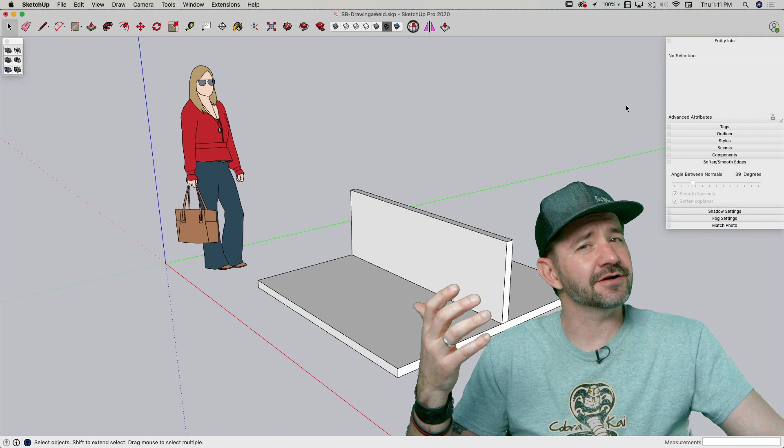So I want to take a look at something. This was actually a request that came up—I've seen this on our forums a couple times too. Somebody asked me how I would go about drawing a weld, not just two pieces connecting, but the little bead of molten metal between the two pieces connecting them. The messier the better was one of the comments, like how to make it obviously look like a weld, because if you grind it and clean it up nice and smooth, it's easier, but if the weld's messy, it's harder to model. I have an idea of how I'd do that, so let's take a look at it right now.

All right, so I have two groups here meant to represent metal plates of some sort. I'm going to start making some geometry, throw it down here. We'll use solid tools, so I have solid tools over here. It's going to be pretty basic, simple tools we're going to use.

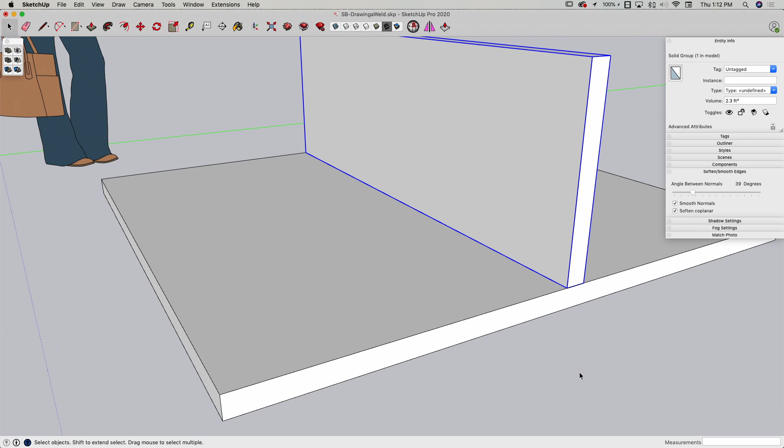Let's start with the Polygon tool. I'm going to come over here, grab the Polygon tool, and draw a polygon. Actually, I'm not going to use polygons—I'm going to use a circle instead, with 8 sides.

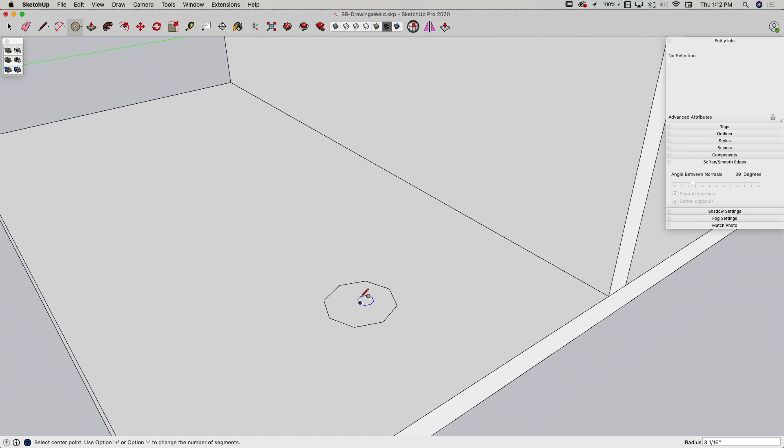Why a circle instead of a polygon? I'm just going to draw a shape here on the ground—the sizes aren't going to really matter, I'll resize this stuff as needed. If I pull this up, this is why I use a circle instead of a polygon: when I'm done, I want these shapes to be kind of organic and smooth, so using a circle automatically smooths the edges like this, and it's less geometry to smooth.

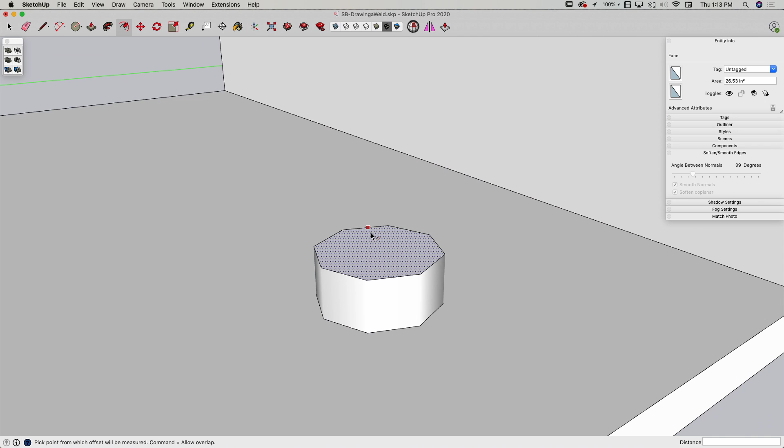So I'm going to create a circle with 8 sides, pull it up like this, and come in here with an offset at about halfway or so. Then I'll select that face and go to move, moving it vertically, creating kind of a dome shape. That's what I'm looking for.

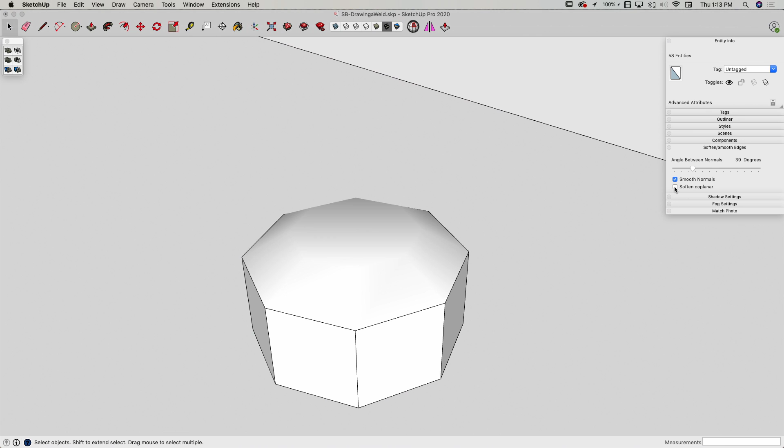Before I go any further, I'm going to take this line right here and smooth it—actually I want to smooth all of this. So I'll triple click, toggle soften and smooth, and bring it up till all the lines up top disappear. That's what I'm looking for. This is going to represent one chunk of weld—I think that's the technical term.

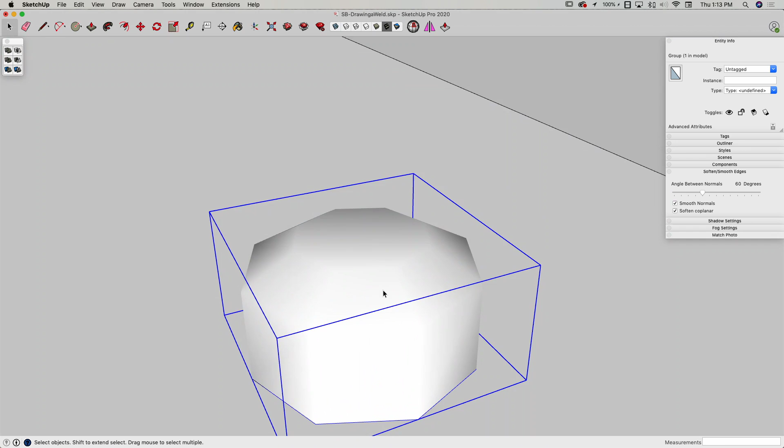I'm going to triple click this and make it into a group. I'm not going to create a component because I want these to potentially be a little different, so it's just going to be a group. I do want to make sure it's solid though, so no extra pieces inside here. For some reason this isn't showing up as solid right now.

If I move this vertically, it's because when I made the group I didn't include the ground. Let me undo that. I'll triple click so it includes the piece on the bottom, and then when I make it a group, it should pop up and say it's a solid group.

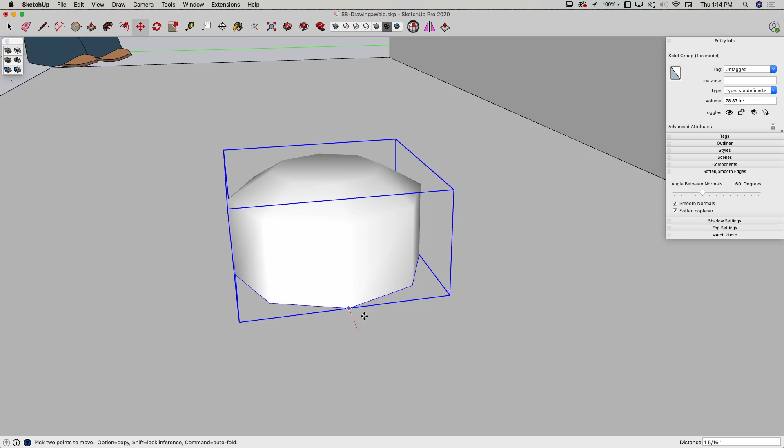All right, perfect. So now I'm going to grab it by this corner and lay that corner right into the corner of the two pieces. Perfect. Now I'm going to rotate it on the red axis, right where these two pieces meet, and rotate it down 45 degrees.

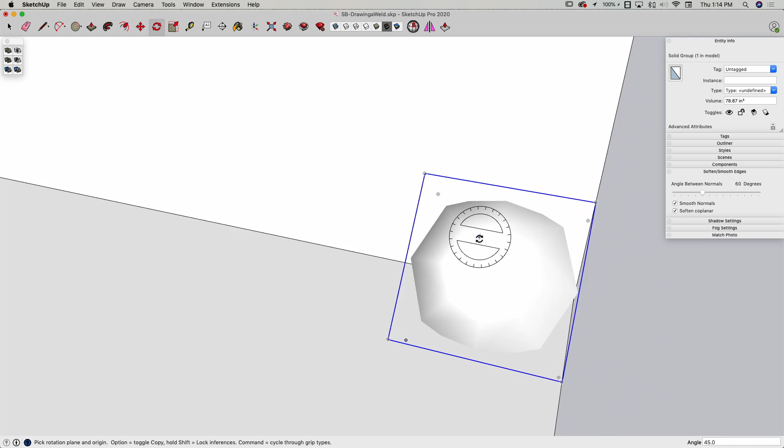So that creates just kind of a little lump there. So I could actually, right now, without doing any more work, I could take that, use move with the modifier key to just start moving copies over, kind of move them not too perfectly, but every couple, like an irregular pattern of a line of weld like that.

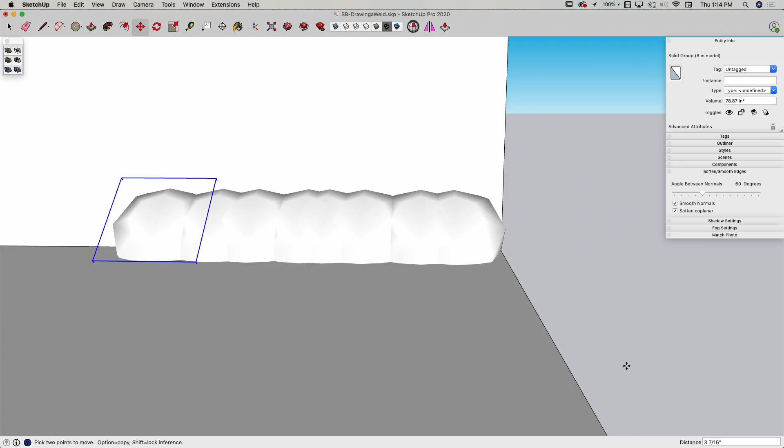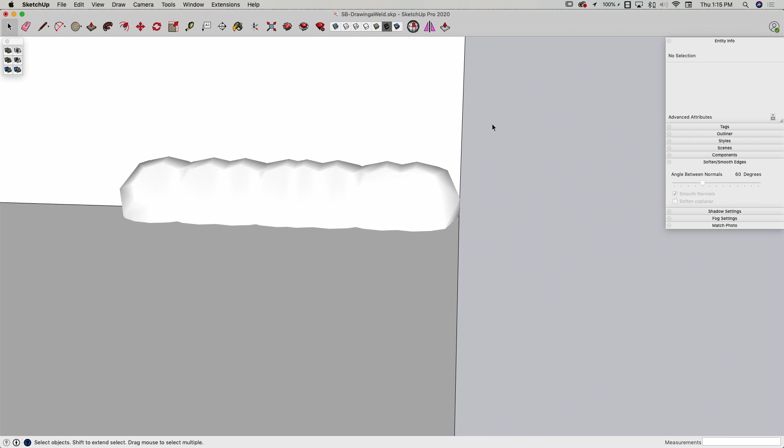That could work, that could be good enough. I could actually take that right now, grab all of that, use solid tools on it, use the outer shell, click, and then run smooth on it. So it's possible that right there might be a good enough weld.

I could take that, do a little deformation, maybe scale it, stretch it out a little bit, and that could probably pass for a weld if I zoom back like that. That doesn't look too bad. That's a good way to do it.

But let's go a little bit further. I'm going to undo a couple times and get back to just my single weld piece.

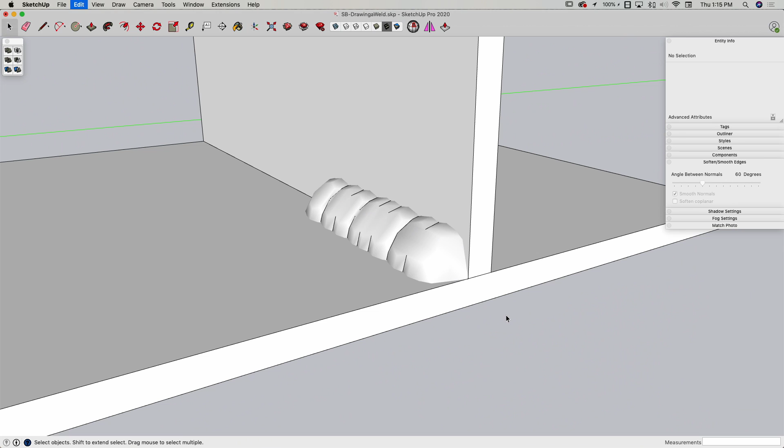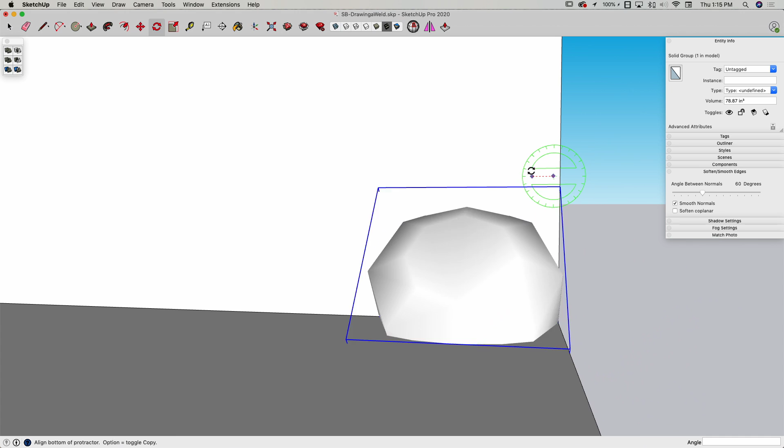So as weld pushes along, it kind of dips up and drops down in profile. So I'm going to take this piece, I want to actually rotate it like 30 degrees across this axis. So I can't, it's not real easy. If I come in here to rotate it right now, I'm going to get off kind of wonky, weird axes.

What I'm going to do is double click to go inside the group. When I go inside the group, you can see how my axes change to inline here. Let's go to View, Component, Edit, and Hide Rest of Model, get rid of everything else.

So what this lets me do is grab everything while I'm inside the group, go to Rotate, I can constrain to the green axes and then use this point to pull it this way, like maybe 30 degrees. There you go. See what I'm going for?

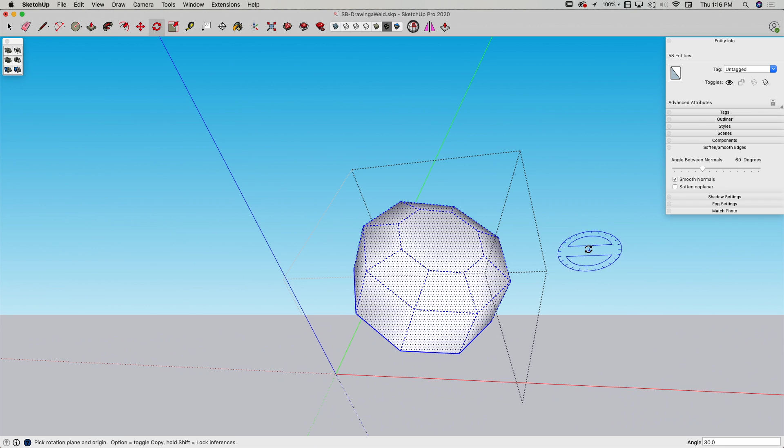That's going to jump up a little bit. I'm going to need to move it a little bit, so I'm going to select it, and we'll move it back a little bit from the corner. We'll move it horizontally and vertically to kind of bury it down into that. Oh yeah, that's what I was looking for.

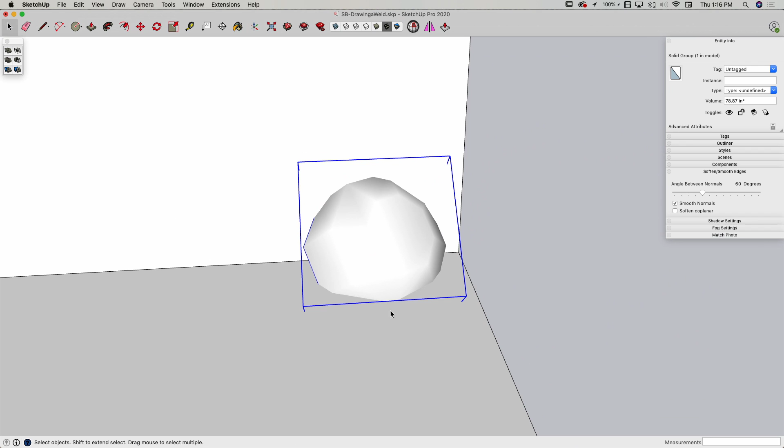That's better. So I'm going to grab that now, go to Move, modifier key to make a copy. There we go. See how we're getting that kind of ripple that happens when welding gets done?

So I'll make another copy. That one I won't move quite as far. Next one I'll move a little bit further. Yeah, so that's kind of cool looking. That's what I'm going for. That's what I actually want to see.

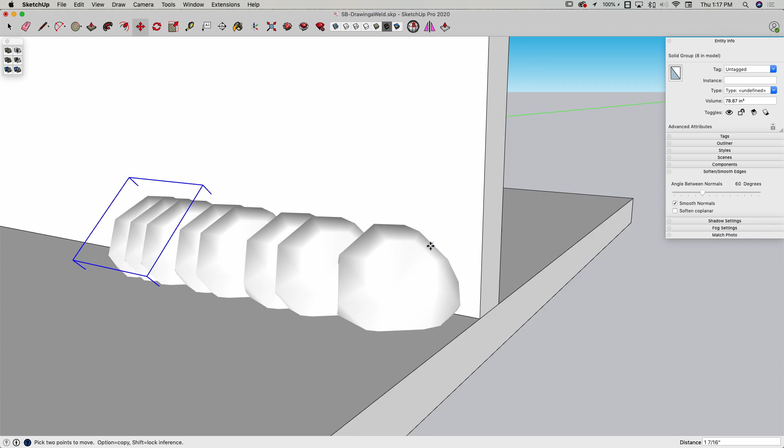If I look at it from the edge though, I'm going to do more cleanup, but it looks pretty uniform, right? So it looks a little too good.

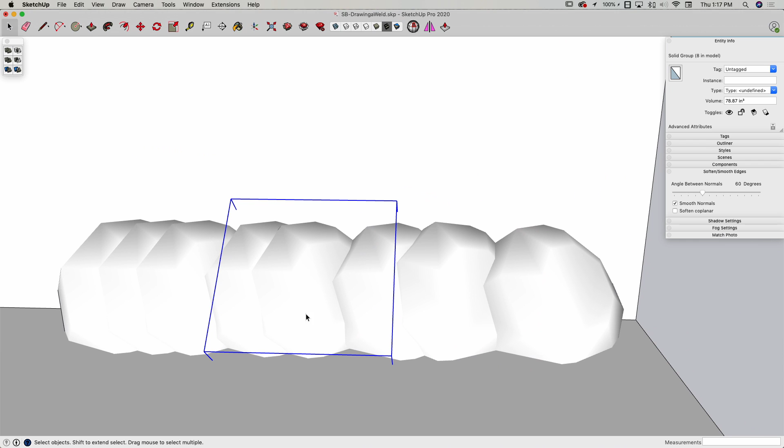So what I'm going to do is pick this second one, and go into Move, and give it just a little rotation. I'm going to go every couple and use Move to rotate it back and forth. I could do one after another too. I mean, I could do this, that would work too. But that's going to spin it around so I don't have that uniform look.

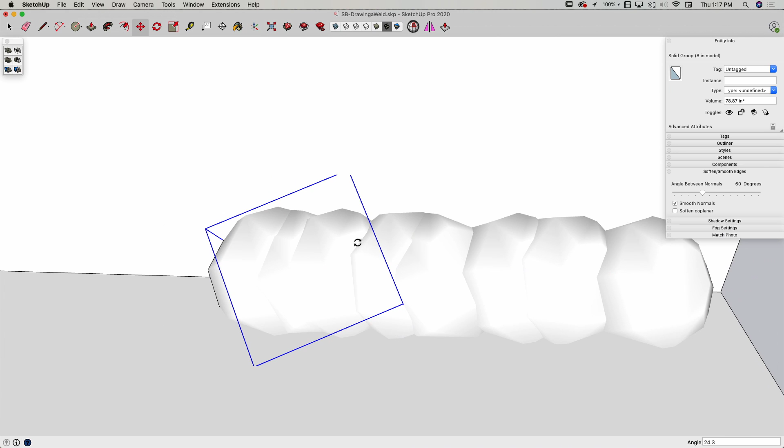See, these ones all line up perfectly. These ones don't. Makes it look a little bit more like it's not perfectly created by a computer program or something.

All right, so I'm gonna flip this one, just a little bit of rotation. Oh yeah, there we go. So you got some non-uniformness there.

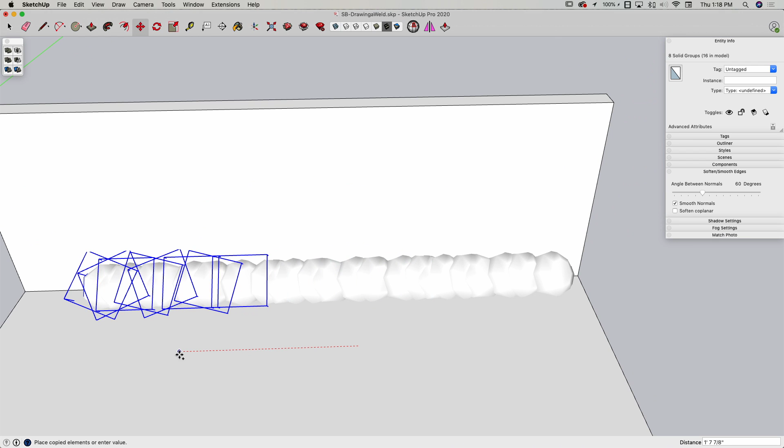Now I'm gonna grab all of these and modify or copy again. So we will have a repeating pattern here, but if we do that, and then I'll copy it one more time, this time I'll move it over a little bit more. All right, so there, that's a good string. That looks like it could make a good weld. So now I can grab all of this.

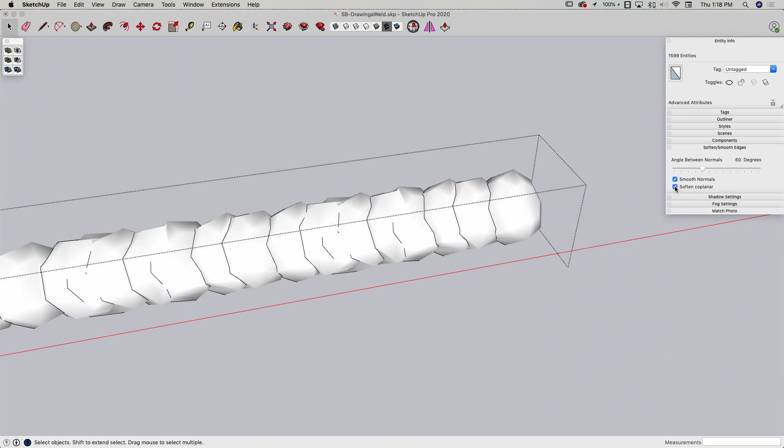I'm going to grab all of these now and make it an outer shell. That's looking pretty cool, that looks nice. I can do a little bit more cleanup here, going into the group, triple clicking, and softening it again.

And here I can just crank this up because I want this to look like one bubbly, weird piece. I can do some deformation at this point too, so like I did before, I can hit scale and stretch this out, and even kind of bring it down a little bit.

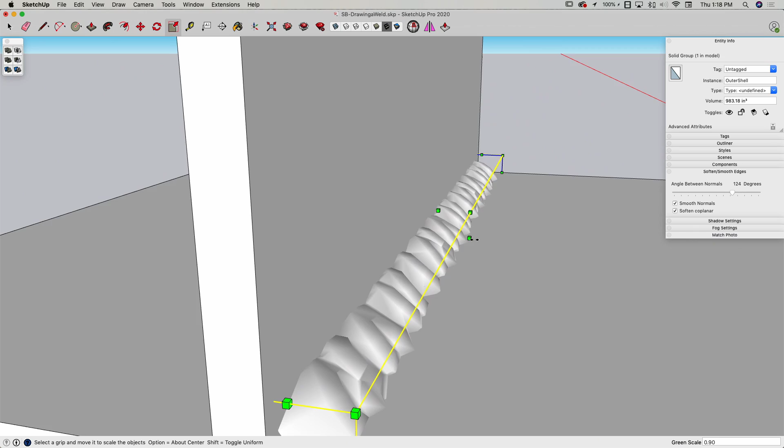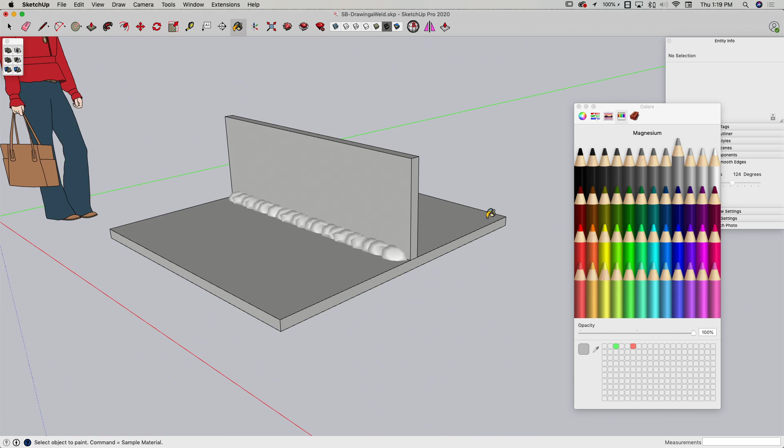That looks pretty good, and then the final piece is probably just going to be some color. This white on white makes it look odd, but if I come in here with my paint bucket, maybe we'll give a nice light silver, a little darker, to the weld, and then maybe just a slightly darker color to the plate. And still big, this is huge, but if I grab all that and scale it down...

Yeah, that could pass for a messy weld. I've welded once, and this is not too far from what I was able to create. That's not a brag, that's just a statement.

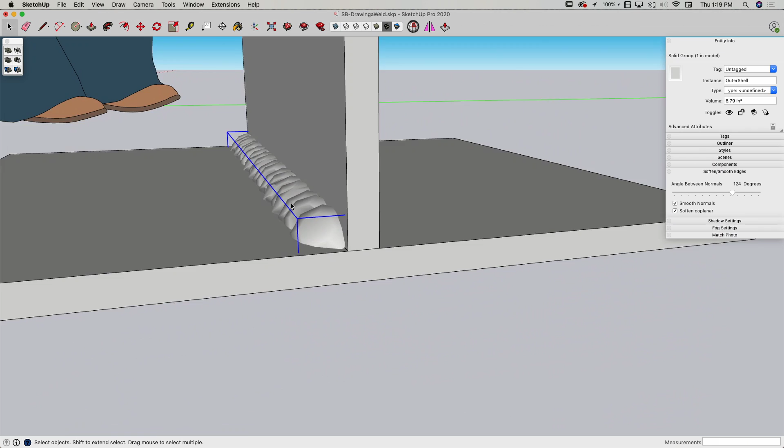If I was to go just a little bit further, one more thing I wanted to do, I could make this a reusable piece if I wanted to. One of the things I could do is select it, and then I could actually cut it off at these two pieces. I could select this piece right here, and use this piece to trim this, so that's going to break it on that side.

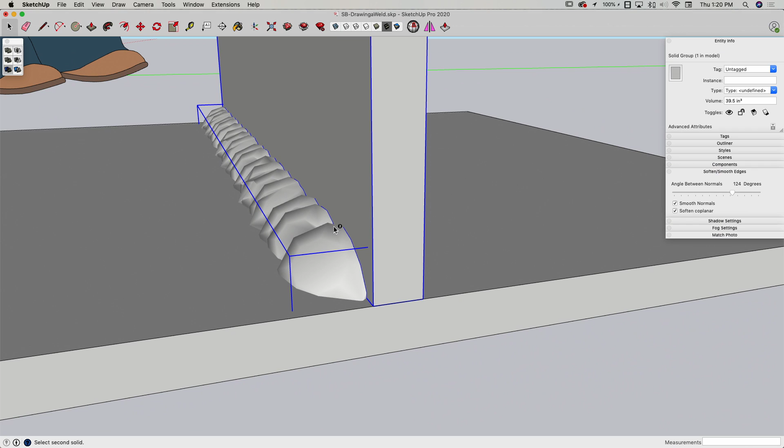Same thing, I'll grab this bottom piece, trim, break it on this side. And what that's going to let me do then is I could actually select that, bring it over here, and then let's actually go ahead and use the rotate handles and move to spin that 90 degrees.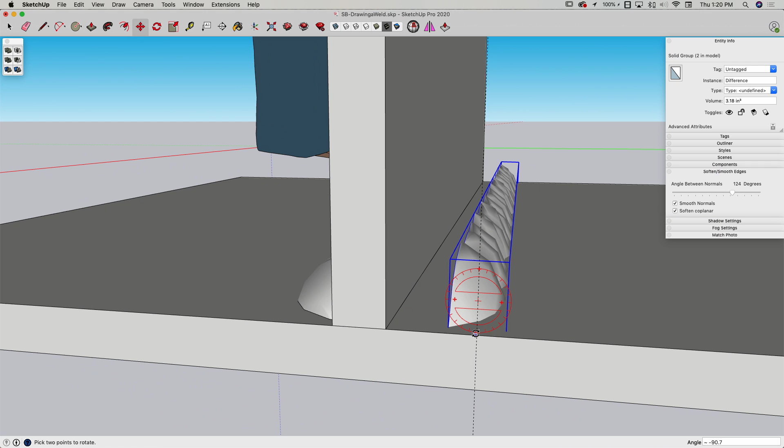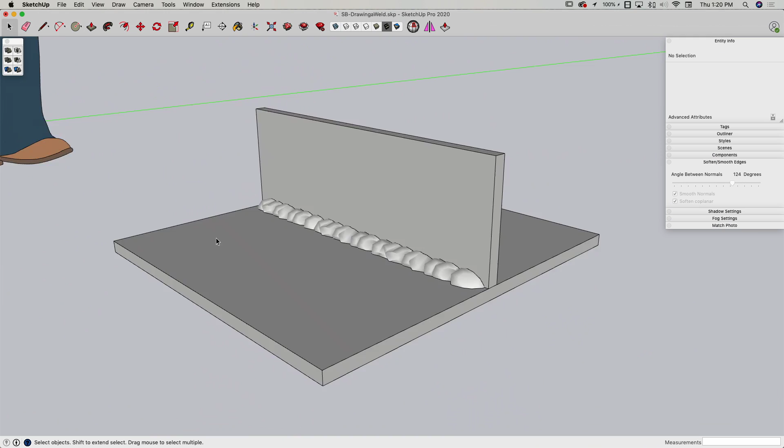Oh, I had it, let's just type 90. I'm sorry, minus 90. And then we'll take that as it is and grab it by that endpoint, drop that endpoint right here with that, and slide it over. We could actually make that a component then and stretch it as needed or multiply it up so we have multiple pieces. But that is how I would go about making a messy weld inside of SketchUp.

So hopefully that satisfied the people who were asking for a weld. Like I said, they weren't looking for a nice cleaned up, super smooth weld that you would just do by putting an arc in there, push/pull or Follow Me along the two pieces that are being welded.

But to make that messy organic look, you do have to do something like that. Now, I could have done that with higher resolution geometry too, gone up to like a 24-sided circle, even made a dome and used that. The problem is I would have made my model very heavy very quickly. By using 8-sided pieces, I probably still added 1,000 or so entities to that model putting that weld in, but it would be pretty easy to put like 10,000 plus if I had real smooth organic shapes. When you consider this is going to actually probably be pretty small, it's a great way to create that organic looking geometry in just a few minutes and dump that on there.